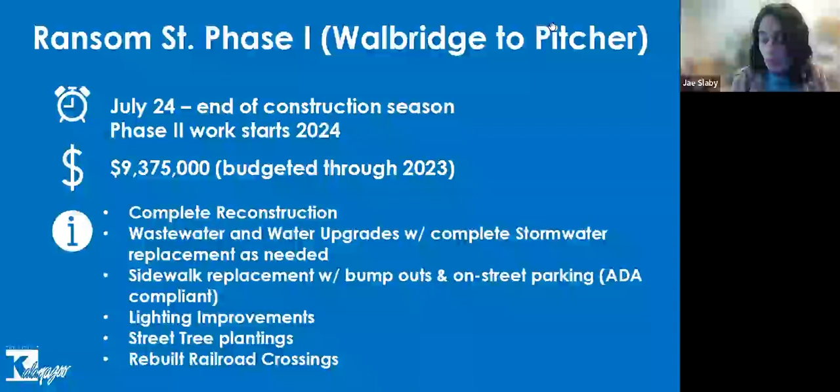Nolan, one second. Ryan, if you're able to, it would be nice to share why it's so important that we're replacing the sewer main along the street. Yeah. So we're upsizing the interceptor that runs down Ransom Street. We call it the Ransom Street Interceptor. We're very creative in our naming structures. So historically, it has been undersized for roughly 20 to 30 years from a capacity perspective.

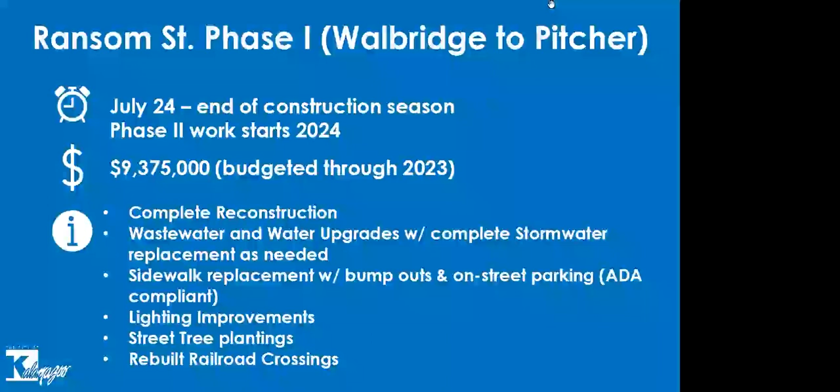So everybody's priorities have aligned to where it made sense that we can now join forces between the three utilities to really get the best value through this corridor, utilizing everybody's resources and then the needs of the other two utilities, water, stormwater, and then streets as well. So, criticality from a flow perspective, so that way we have the capacity to continue to do what we do every day, and that's convey 28 million gallons of sewage to the wastewater treatment plant to treat it and discharge clean effluent to the Kalamazoo River. Awesome. Thank you, Ryan.

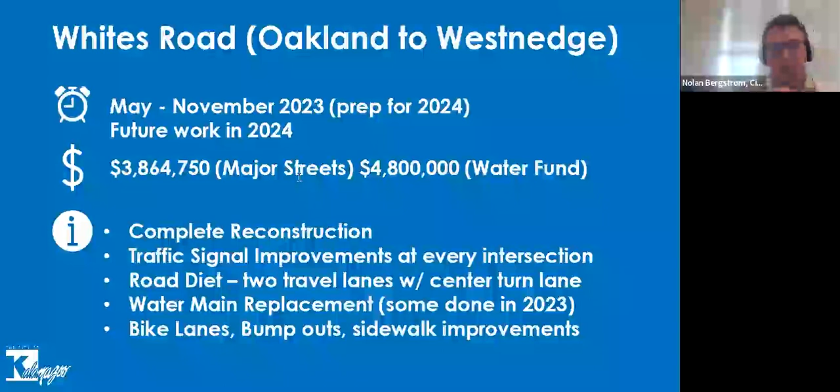All right. Moving on to White's Road, we've got a couple projects that Anthony Ladd will provide updates on, starting with White's Road and then moving to Paterson Street Bridge and Howard Street. Sure. Thanks, Nolan. White's Road will be another multi-fund project that has road work, stormwater improvements, traffic signal improvements, and water main replacement, which has been kind of our MO lately for some of our projects in previous years, like Parkview Avenue, Oakland Drive, and Cork Street, also on Portage there too.

So this work will begin later this year. This is going to span a 2 calendar year project starting in '23 and finishing in the late '24 construction season. This project has been awarded. However, we have not had our pre-construction meeting just yet. That'll be happening next month in July to fine tune some scheduling, and we'll put out more information once that becomes known to us. But it was bid as a project that will be broken up into 3 distinct phases, with phase 1 being done this year, and that'll focus on White's Road between Oakland Drive and Parkview Avenue.

That will be, for the most part, a complete closure. While again we've done many projects in this area, we will make sure to maintain all business access and access for residents and commercial traffic through there. We will have a detour route that routes traffic along Parkview Avenue to Oakland while that work's going on.

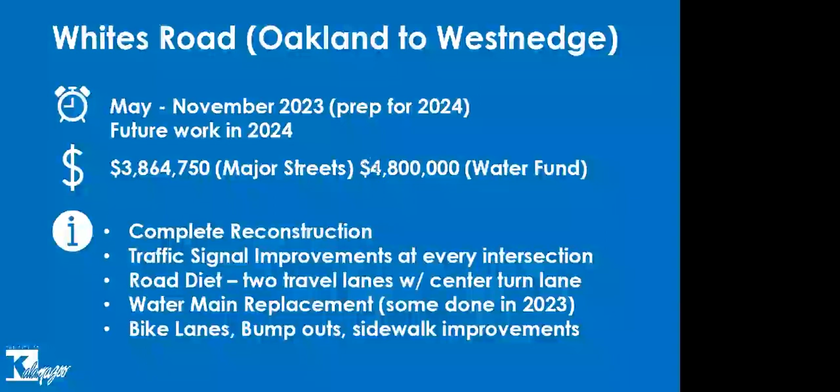Paterson Street Bridge. We had the closure of Paterson Street starting in February of this year. It will remain closed through August, roughly right now till about that Labor Day timeframe. This was a project where we were doing a complete deck replacement of the superstructure there on Paterson Street Bridge, crossing the Kalamazoo River. This is a pretty cut and dry project from the aspect of deck replacements.

Work has gone well. There haven't been any surprises. They have just completed pouring the bridge deck itself. We will be doing some sidewalk repair and building railings, and then finishing with painting will be the last activity that's done. That project is on course to finish on time, and as far as lane assignments and pedestrian and vehicular movements go, it should be pretty similar to how it was before.

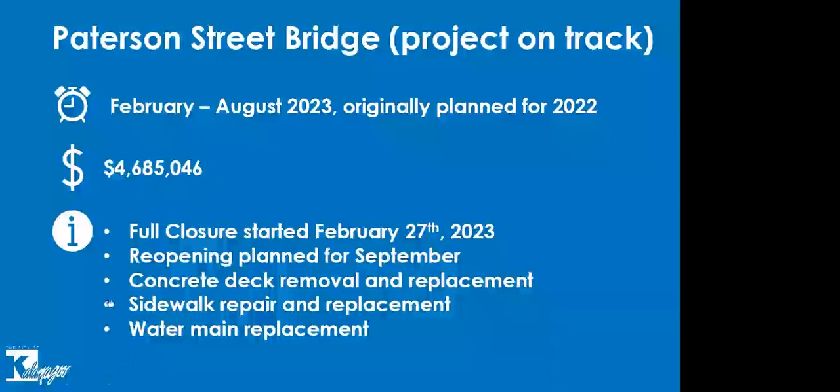Right. And then the last project I guess I'll speak on is our Howard Street project from Oakland Drive to Stadium Drive that is currently going. It started this month, and it will finish substantially by the end of July. They have completed resurfacing in the southbound, or the south side of Howard Street there, and have switched traffic over to start work on the northern side of Howard Street.

This was an opportunity where the surface was in need of repair and rehabilitation. And while we were doing that, we saw an opportunity to create pedestrian enhancement there by putting in a pedestrian refuge island that will run from Waite Avenue on the south side of Howard and connect to the non-motorized pathway that Western Michigan University maintains and operates on their property, that will connect to our non-motorized path that we installed further up on Howard Street a couple of years ago and onto our non-motorized pathway on Stadium Drive. So really make a big non-motorized connection there that we're excited to see.

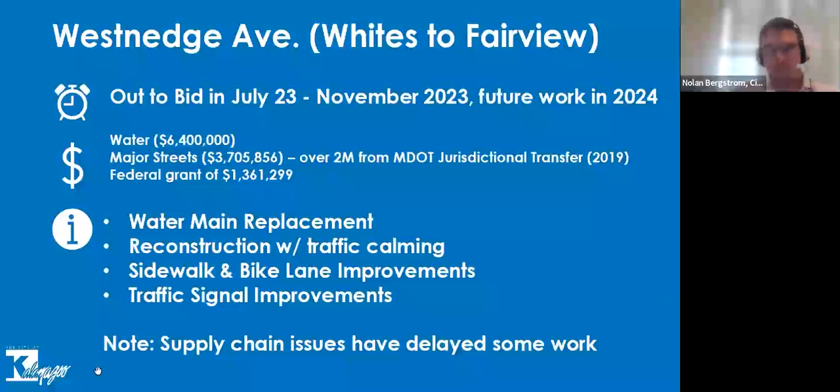I guess I can start out and talk about Westnedge, and in particular, we're starting to get results back regarding the lane narrowings and lane reductions that we've done on Westnedge over the last several years. And while there's still not a lot of data, only a year or a year and a half of data to compare, what we're finding, and I think this is what's most interesting for folks, is that in terms of crashes, severity is down.

And it's down significantly. I think we've been talking the last couple of days on WMUK about 10% reductions in severity. Actually, it may be higher than that. But again, we don't have a lot of data. Usually we like 3 years of data to be statistically confident in something. But what the trends are showing are very much a reduction in severity and in particular reduction in bike crashes. Not only on Westnedge, but all over the city, which is very good. I think that's a lot of folks concerned about that.

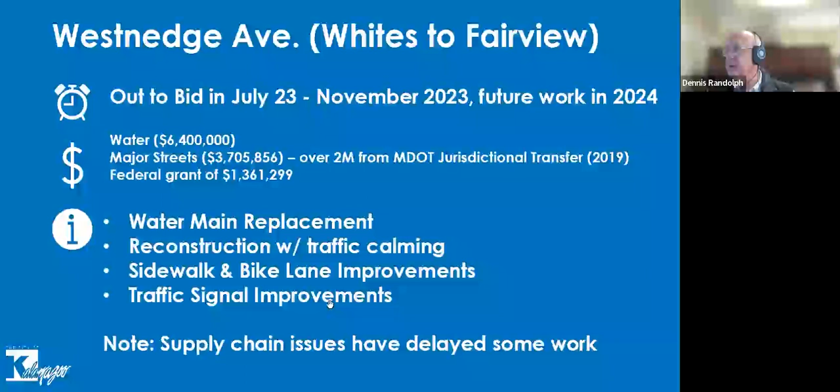I expect certainly on the big job that George will talk about in a minute on Michigan Avenue, where we'll be doing some substantial things to reduce speeds, that this will really contribute. By next year, we should have even more reduction in severity, which is one of those key indicators that we look for in terms of safety on our streets. So I think that's all I really have regarding the work we've been doing out on Westnedge and Portage. And maybe George could talk about Michigan right now. Okay, thanks, Dennis. George?

Yeah, appreciate that, Dennis. So on Michigan Avenue, where we are in this project is we've completed the first phase of work, which was the pothole patching. That was completed as of late May. And the next phase for us is going to be to seal up the roadway. So we're going to be doing some crack sealing as part of the prep work, and then doing a surface seal, which is called a fog seal. Once that's completed, the road will be restriped and painted. Basically, what we're doing there is taking away redundant lanes that lead towards faster speeds, kind of as Dennis was saying.

So really trying to have traffic move through Michigan Avenue at a consistent rate at the speed limit, at a safe speed through our downtown area, which is very important to us. Making sure that we can have pedestrians crossing north-south across Michigan Avenue without having really fast traffic coming at them. So with that, there's going to be some changes to the on-street parking location. That'll be moved out. And then in the remaining space, after those safety improvements have been made, we'll have some room for a two-way bike facility.

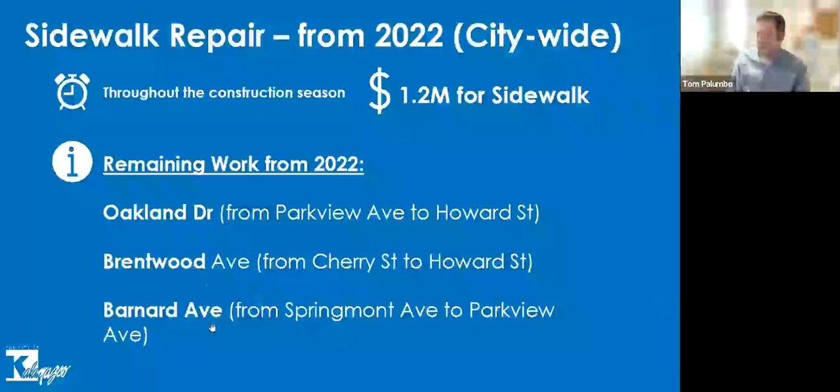So basically, we've got two really big sidewalk projects going. The repair project is the first one, and what we call the gap fill project is the second one. Gap fill being, you know, there's no sidewalk there right now. We're putting it in brand new. So Tom, could you describe what goes into sidewalk repair?

Yeah, so we're looking for areas in the city where the sidewalk condition is just falling apart. It's not up to standards with the Americans with Disabilities Act, which means that if somebody's in a wheelchair or blind or anything else that makes them a more vulnerable user, we want to bring our sidewalks to a level where the most vulnerable users are going to be able to easily use sidewalks.

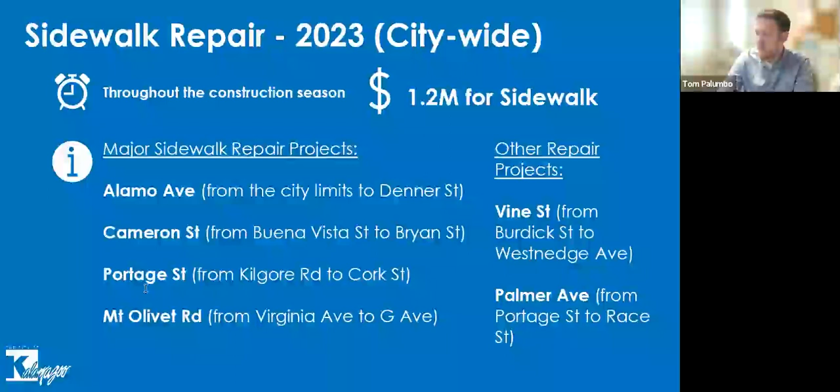And then another one that's not on here is Maple Street. That's a street that we recently repaved, and we've done quite a bit of sidewalk work as part of that repaving project too, on Maple between Park and Burdick. So that was one that I also wanted to add that came to mind. I was gonna get that to you, Nolan, so you could put it on the slideshow here, and I just didn't get it to you in time. But yeah, so we've got quite a bit going right now for sidewalk repair, and then moving on to sidewalk gap fill or new sidewalk. I'll let George talk about that one.

You're muted, George.

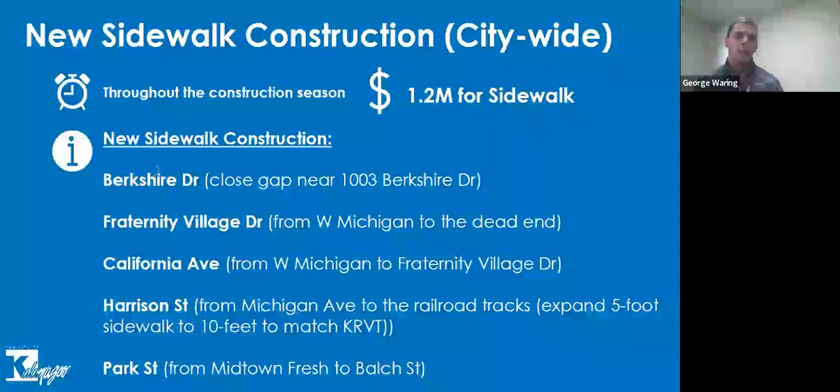And so these are areas where we are installing new sidewalk, where there currently isn't any, and there are existing gaps in the network. So each of these have been either requests in the past or lead to neighborhood amenities. And so we are going to be installing sidewalk in these locations. So it's been a really neat program, one we're very excited about having going on. And good part is, construction wise, we're about 2 months ahead of schedule on the gap project. So that's really good news. Our contractor has been very good to work with and been staying well ahead of even where the schedule was.